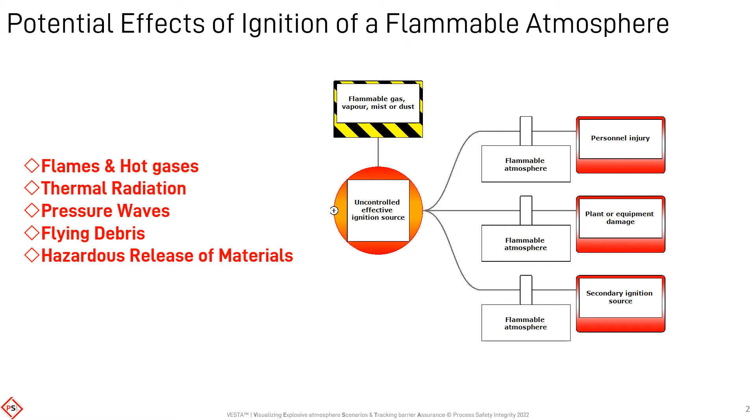If an ignition occurs, the effects may be reduced by suppressing or venting the explosion, or the equipment or structure is designed to be capable of withstanding the impact.

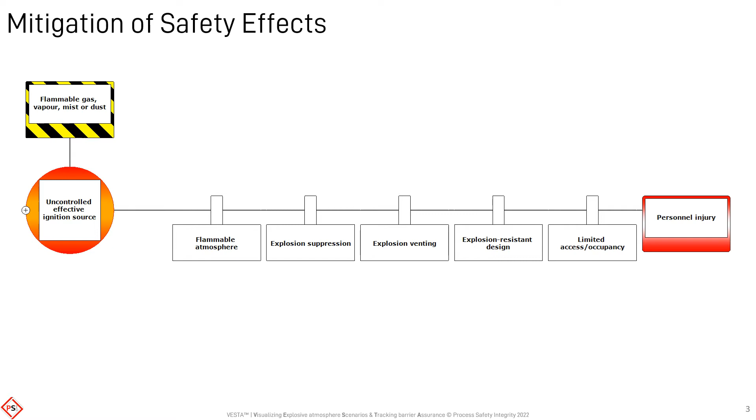Reducing the access to, and/or occupancy within, a hazardous area may contribute to the risk reduction. The impact on fixed plant or equipment is not reduced by access or occupancy, unless they are mobile and only occasionally in the hazardous area.

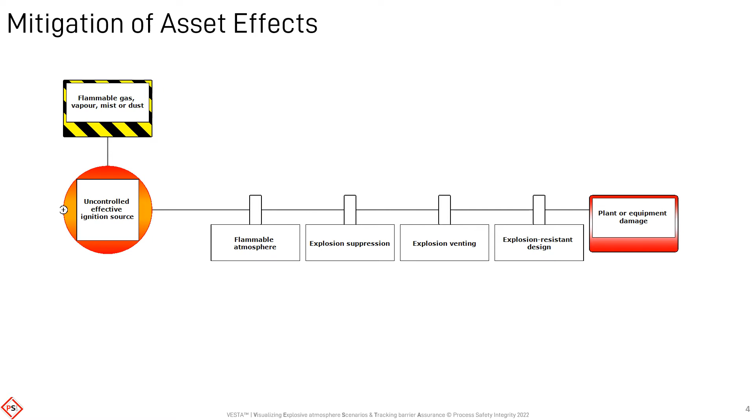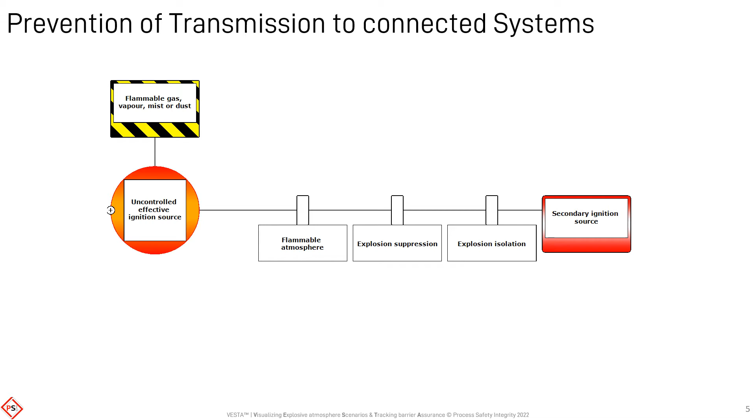Combustion products, e.g. burning embers, may become an ignition source to upstream or downstream systems if the explosion cannot be suppressed or isolated.

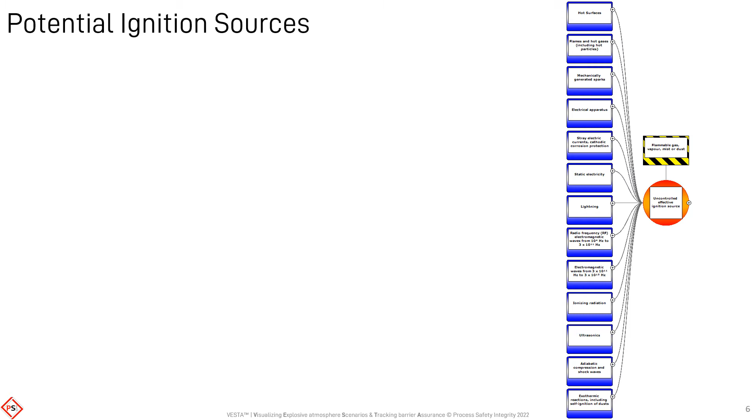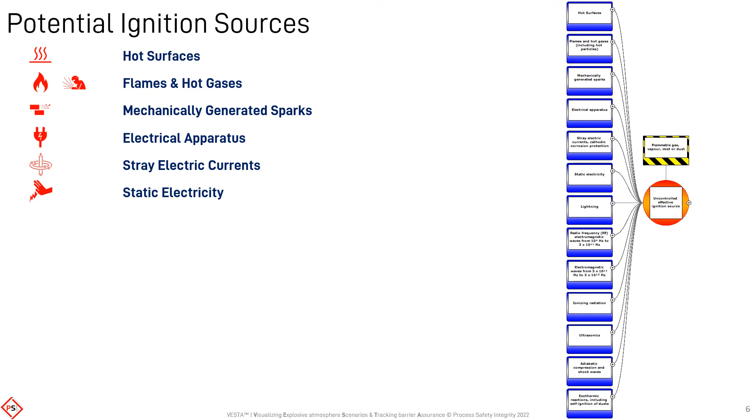A list of potential ignition sources has been developed from EN 1127 Part 1. These threats are hot surfaces, naked flames or hot gases, for example from welding, mechanically generated sparks, typically friction, electrical apparatus which may create sparks, stray electric currents, static discharges, lightning strikes, radio frequency waves, radiation in the spectral range of electromagnetic waves, ionizing radiation, ultrasonic sound waves, compression and shock waves, exothermic reactions including self-ignition of dusts.

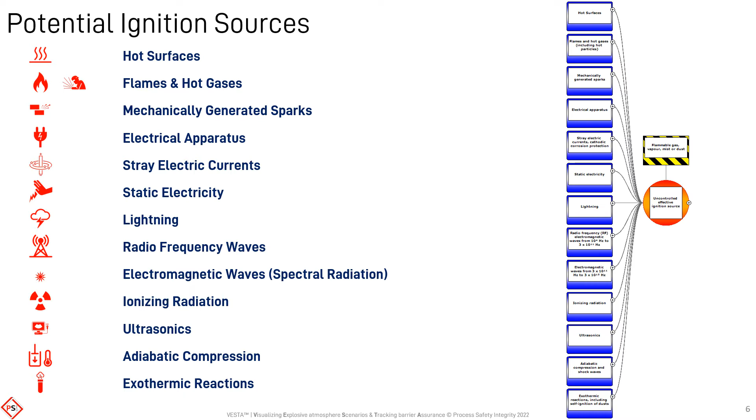Each ignition source will have their own controls, which typically involve components which are designed, constructed, installed and maintained in accordance with relevant standards.

Other controls may rely on the physical properties of the materials being processed. Containing the energy source or isolating it from the flammable atmosphere may also be an appropriate control. Sensitive materials, which have the potential to auto-ignite, should be stored or processed under benign conditions.

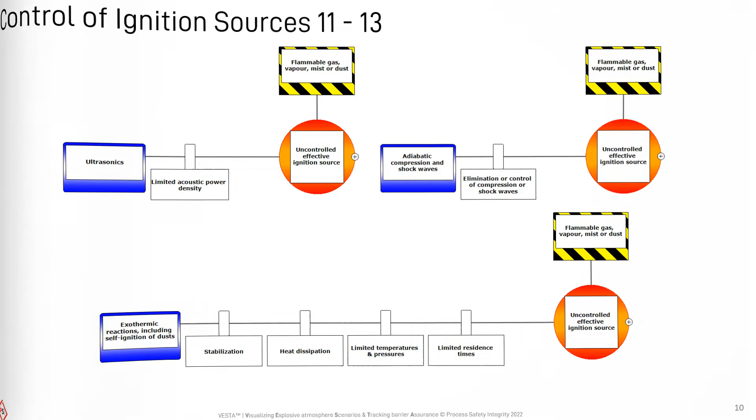The likelihood of an ignition source occurring or being present can be categorized using a simple relative frequency ranking, according to the conditions that would create the threat.

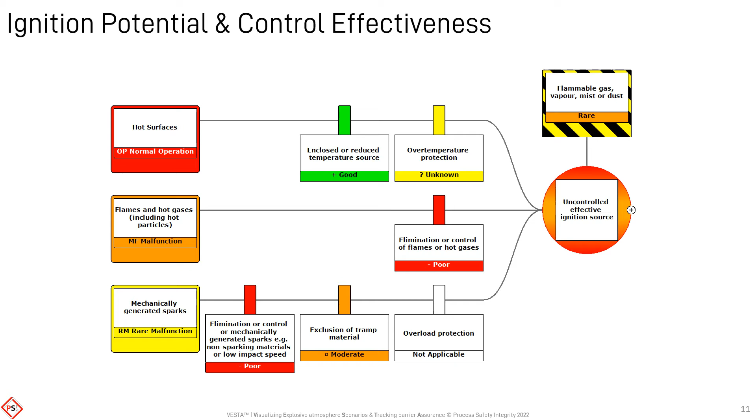The effectiveness of each prevention control can also be relatively ranked, based on evidence, experience, or judgment. Not all barriers will be applicable, depending on the age or design of the facility, and the effectiveness of some barriers may not be known, which should be a cause for concern.

The aggregate likelihood of a credible and effective ignition source, combined with the potential for a flammable atmosphere, indicates the possibility of an explosion. The effectiveness of the mitigation measures are also relatively ranked in the same way as the prevention controls.

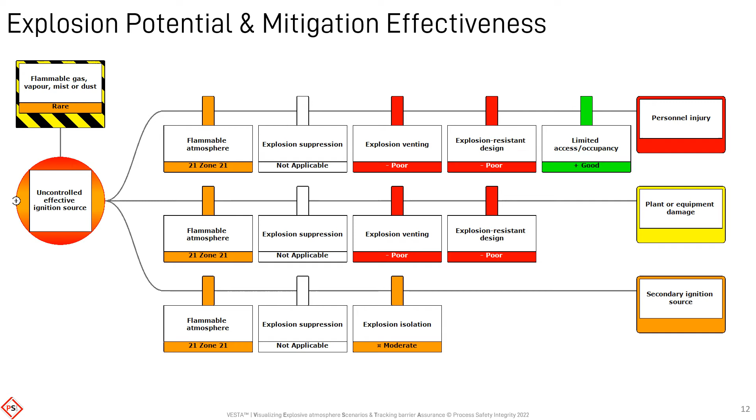The relative severity of the effects on personnel or the assets can be used to determine the risk target. The combination of threat frequency, prevention effectiveness, flammable atmosphere potential, mitigation effectiveness, and consequence severity can be used to qualitatively

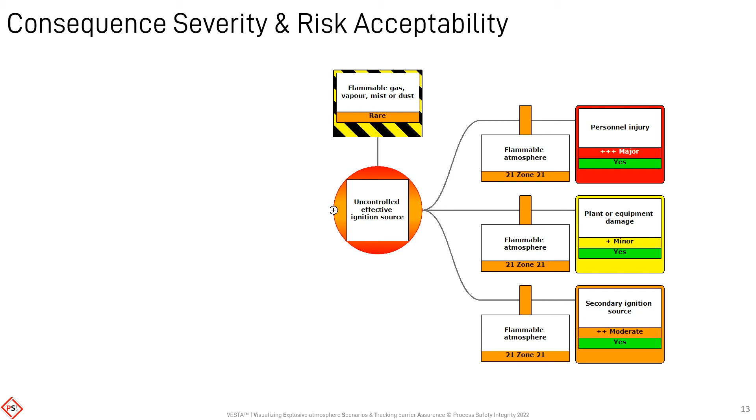or, with good data, quantitatively predict the residual risk. This is compared to the risk target to determine if the risk is acceptable or not.

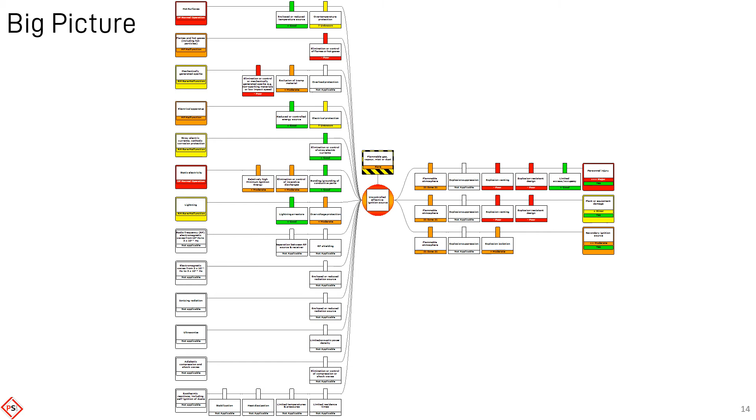Showing all the possible ignition sources and associated prevention or control measures, plus all the potential mitigation measures, gives a holistic view of each scenario and can be used to demonstrate that all aspects have been considered.

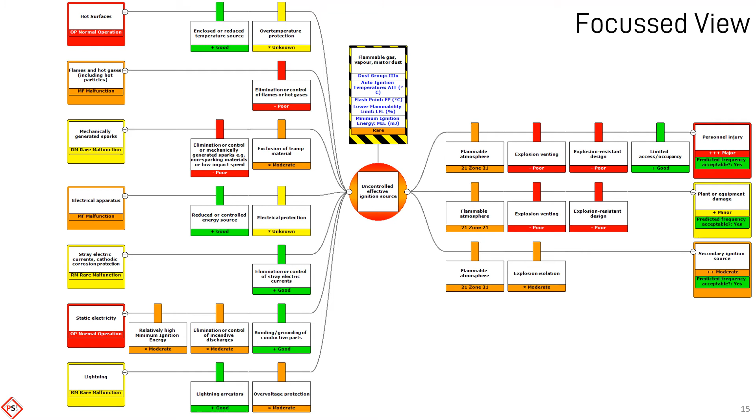Using advanced filtering within Bow Tie XP, the scenario can be condensed into a focused view, showing only the credible or applicable elements.

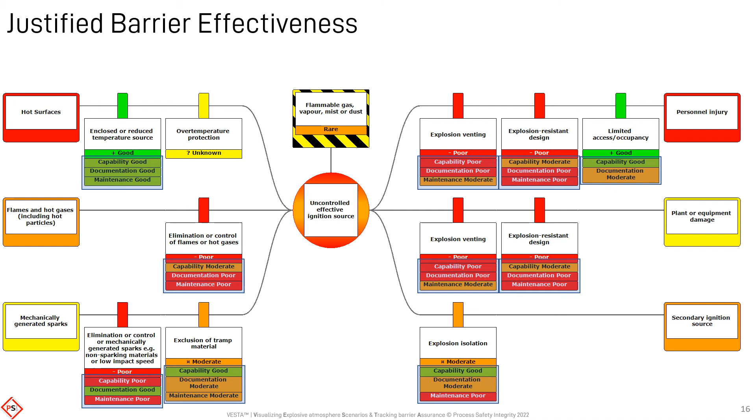To support the selection of barrier effectiveness, the assessment may consider the key components that sustain it, e.g., how good are the associated people, processes, and plant.

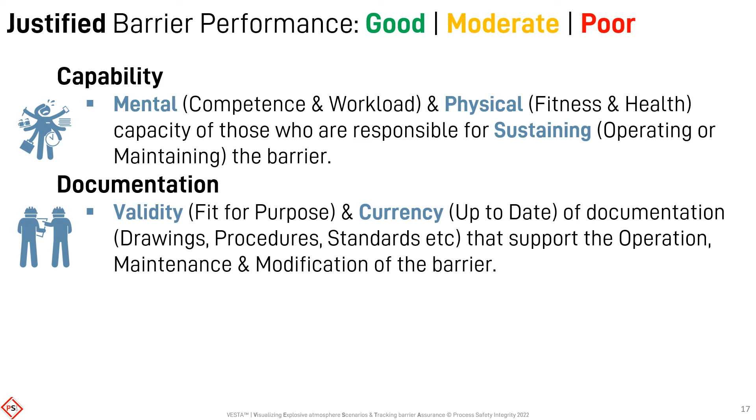The personnel who ensure the presence and performance of the barriers must themselves perform effectively. The paperwork which guides the planned and unplanned barrier tasks must be accurate and accessible. Barriers must be well looked after to ensure they are fit for duty or service.

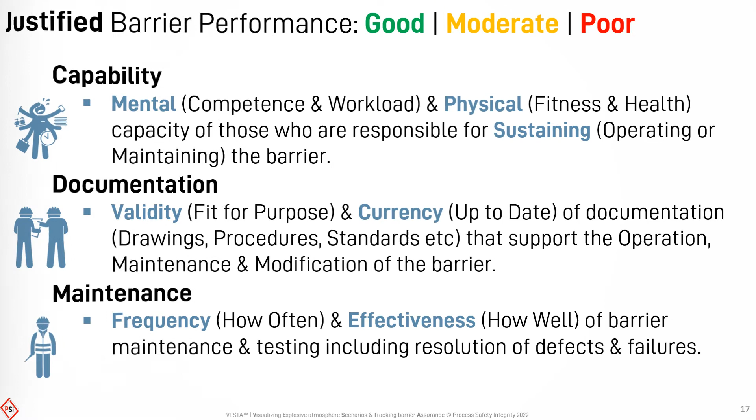The potential for a flammable atmosphere may already be known as part of a hazardous area classification. Otherwise, it may be predicted using simple principles, such as the grade of release and the effectiveness and availability of ventilation. This example is a modified EN 60079 Part 10.1 approach.

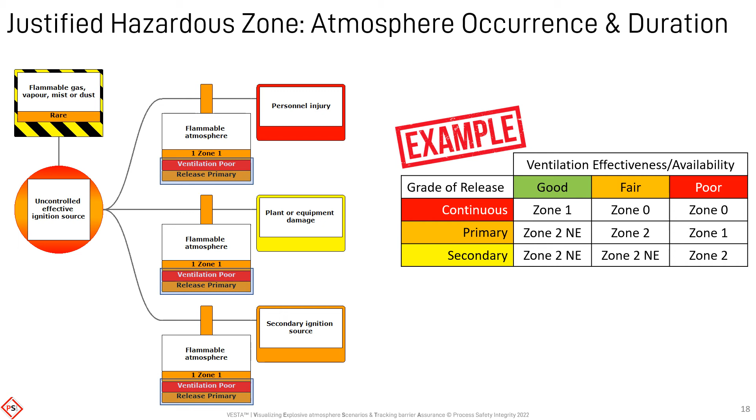However, alternative approaches may be used, according to your jurisdiction or company standards.

Using bow tie chaining and relationship models in Bow Tie XP, the impact on connected systems is more apparent and can be properly evaluated and addressed.

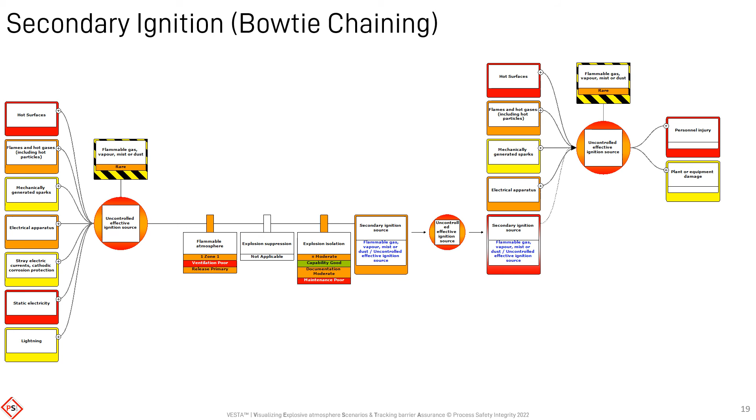Visualizing explosion risk assessments provides a platform for ongoing assurance, and although the method is the same as conventional tabular assessments, bow ties provide a more easily understood and therefore manageable scenario.

Simple color coding of ignition frequencies, barrier effectiveness, flammable atmosphere potential, consequence severity, and explosion risks provides an accessible overview to a wide range of stakeholders, including regulators, who require reassurance that you are and remain in control.

Qualifying or quantifying the components allows sensitivity analysis of the assessment to be conducted. For example, how does the risk change if I change this category or value?

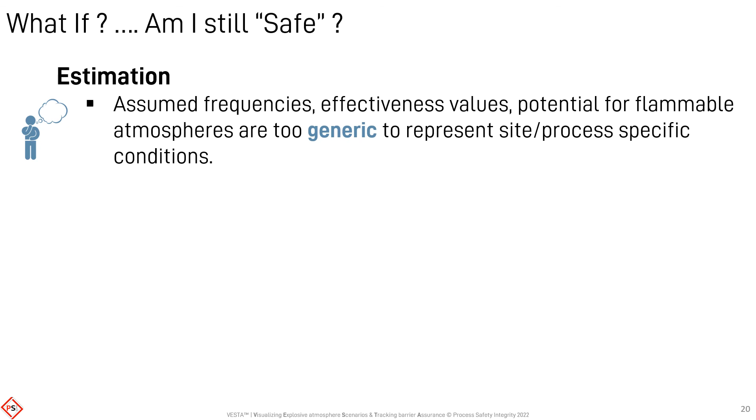Similarly, what is my current risk because my barrier effectiveness has decreased, or my occupancy has increased, since the previous or original assessment?

Representing the fire or explosion scenario visually provides context and highlights the criticality of barriers so that the impact of any planned or unplanned changes to them can be properly evaluated.